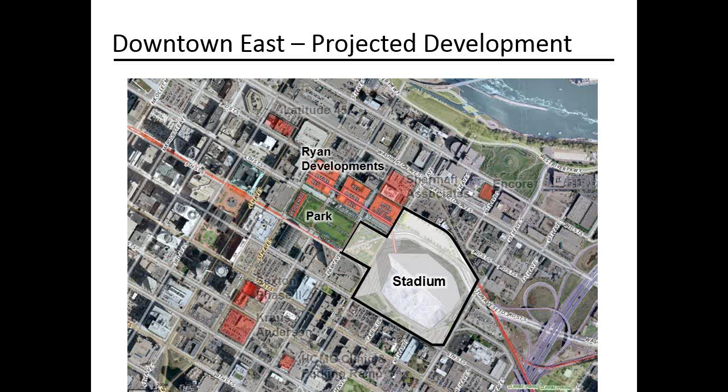For over 30 years, the Metrodome and a sea of surface parking lots have dominated the landscape in Downtown East. However, since the approval of the new stadium, this area has become very popular and gained a lot of attention with developers. The city has approved or been engaged in conversations about a number of development projects. The stadium, the Ryan development, the Commons Park that is going to be constructed, and everything in red are new projects that have either been approved or are in the pipeline to be approved by the city. If realized, we would have 930 dwelling units, 130 hotel rooms, and 1.8 million square feet of office or commercial space built in Downtown East, a vast change from what has happened in the last 30 years.

In addition to new development, there are several transportation projects occurring in Downtown East. There's a new northbound ramp from 4th Street to 35W North under construction. Washington Avenue between Hennepin and 5th Street is being redesigned, with a new vehicle lane and a cycle track added behind each curb. We have a new exit ramp from westbound 94 onto 7th Street being built next year, which will allow for repurposing of the existing exit ramp from 94 onto 5th Street. It's anticipated that 5th Street will be used as a local connection between downtown and the Cedar Riverside neighborhood. I'm sure many of you in this room have been involved in all of those projects.

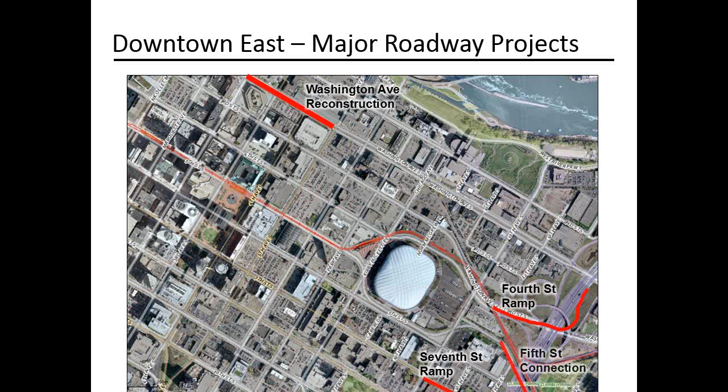This is important because this is different than any other review established in the city for development projects. The stadium was reviewed and approved through an alternative land use review dictated by legislation that waived otherwise applicable regulations, so no zoning regulations were applied to the stadium.

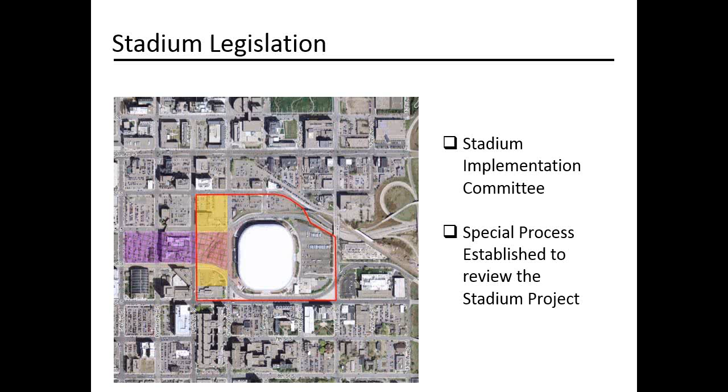If you don't already know, the stadium is 1.5 million square feet in size. There are 65,500 seats with expansion space for up to 73,000 seats for events such as the Super Bowl. At the prow of the building, it's 272 feet tall, equivalent to a 27-story building. Grant Park and Skyscape in Elliott Park, just near the stadium site, are 27 stories.

So for visual purpose, that's how tall this building will be. For reference, the former Metrodome at the peak of the roof was 195 feet tall, so this is going to be much larger than the former Metrodome was.

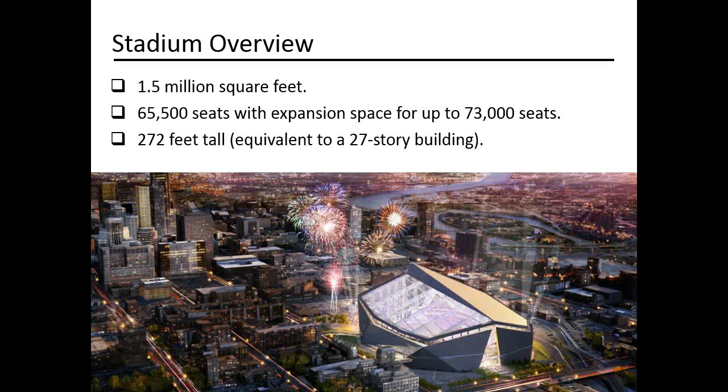The Implementation Committee in 2012 adopted a vision and a set of principles for establishing parameters for its review, because there were no zoning code regulations to help its review. The adopted vision was the best urban football stadium in the country at the core of a vibrant place. A total of 73 principles were adopted, ranging from building design to regional influence.

In August of 2013, the Implementation Committee forwarded a recommendation to the City of Minneapolis to approve a request by the Minnesota Sports Facilities Authority to construct the new stadium.

So the principles that were adopted, I'm going to go through them and give you an idea of what we were tasked with looking at when coordinating with the different parties involved.

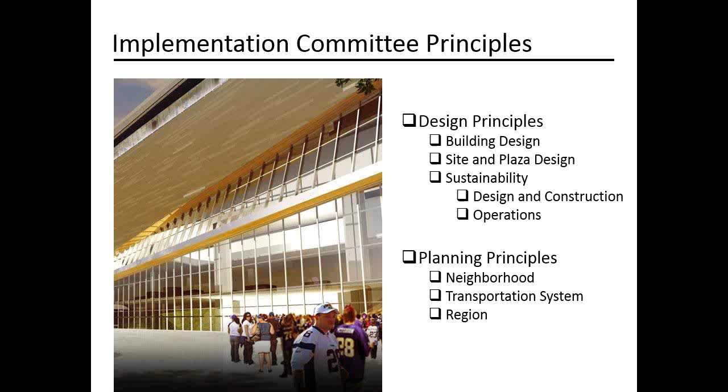For building design, the principles called for a stadium and stadium site that was bold and iconic, that fit in with its surroundings, that didn't turn its back to any of the surrounding streets, and that used landscaping to soften the edges of the building.

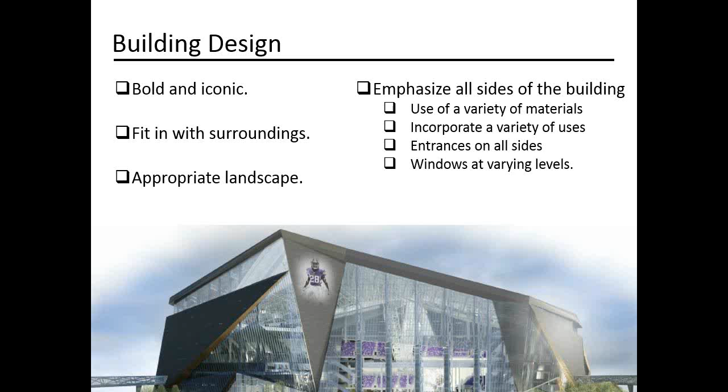The site and plaza design principles required stronger pedestrian connections to the surrounding neighborhoods, the ability to walk all the way around the stadium, a plaza that is a destination every day of the year, not just on event days, and that we incorporate public art into the site and into the building.

There were many sustainability goals for the new stadium, including meeting the B3 Minnesota Sustainability Building Guidelines, pursuing LEED ND for new construction, incorporating best management practices for stormwater into the sites, and coordinating a waste and recycling program within the facility itself.

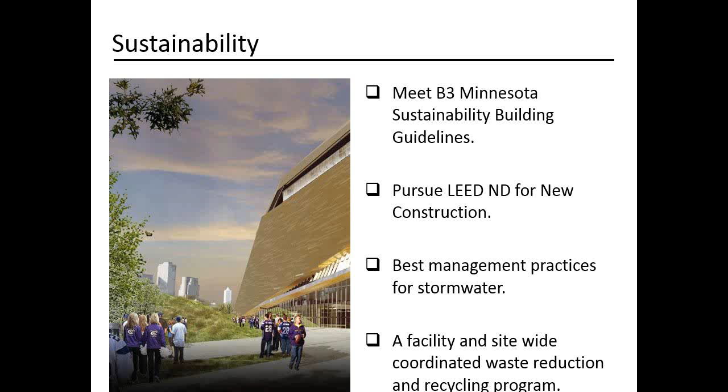The desire of the Implementation Committee was that the new stadium would fit in better with its surrounding neighborhoods, that the stadium would encourage other development in the area—and I think it's done that already—that the stadium would promote more activity at the street level at all hours of the day, not just on event days, that the stadium would program plaza activities for people of all ages at other times, and that the project would enhance the streetscape experience in the area.

The transportation principles called for integration with the existing Downtown East Light Rail Transit Station, improved walking, biking, and transit connections in the area, a reduction in the amount of surface parking, and improved connections to the regional freeway system.

And the regional principles related to the region encourage sustainable, long economic growth and development, supporting diversity in the local workforce, and encouraging business retention and expansion.

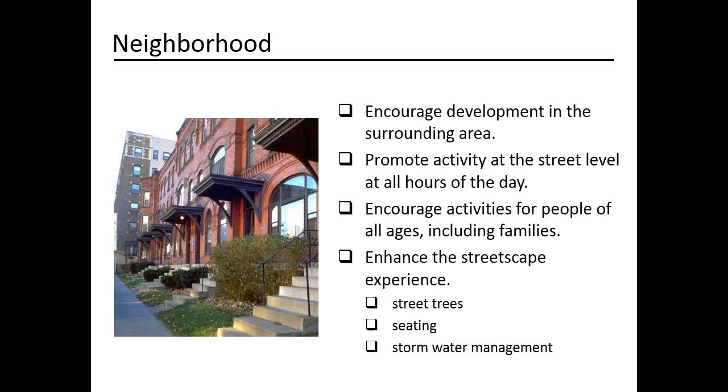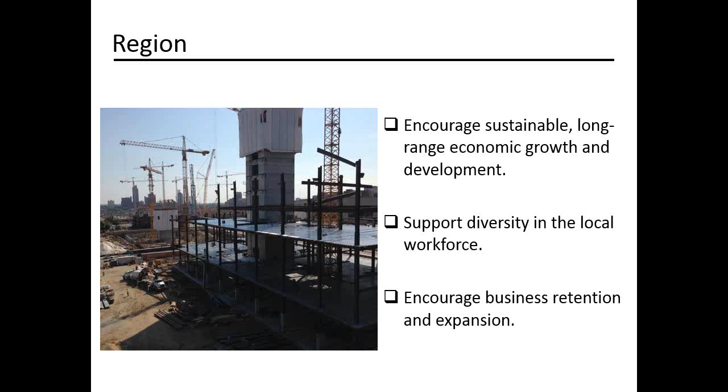Hillary mentioned the stadium and the city implementation committee's principles for the stadium. When it came to transportation, city staff helped translate some of the committee's principles into transportation-related goals. I'll tell you a few of them, starting with some pedestrian-oriented things.

One of the principles translated into a goal was to be sure that pedestrians would be able to walk all the way around the stadium. That was a little tricky because Chicago Avenue is about 15 feet higher than 11th Avenue, and the stadium designers wanted all the fans to be able to enter at the main concourse level. That meant, in order to make their main large plaza a 2% grade from 11th Avenue, they had to have some steps and ramps to get down to 11th Avenue. But you can walk all the way around the stadium.

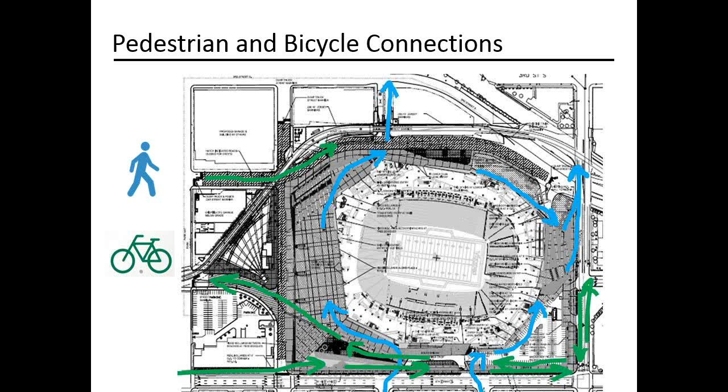The stadium designers needed to ensure security for the stadium site and adequate access for loading docks, deliveries, and drop-offs. They also worked with us to help balance the neighborhood goal for pedestrian connectivity and having the stadium fit in with the neighborhood 365 days a year. Since the site walkways follow the driveways, it was important that driveways weren't too far from the intersections so the pedestrian routes weren't too circuitous.

Now, to tell you about the next transportation puzzle involved with stadium coordination with the city, I'd like to back up to the existing transportation configuration along the south side of the stadium.

5th Street and 6th Street are one-way pairs. 6th Street carries about 9,000 cars a day onto the eastbound entrance ramp for Freeway 94. 5th Street carries about the same number off the westbound exit until they get to 11th Avenue, where most cars turn left or right. But about 3,000 cars a day continue westbound on 5th Street along the south side.

When the stadium authority told us they needed the city's property on 5th Street to make room for the large stadium and its security perimeter, we knew we didn't need to panic. We knew 5th Street probably had some extra capacity, and it was starting to look more and more likely that 7th Street, which Hillary mentioned, would be replacing 5th Street as the westbound Freeway 94 exit.

But we did decide it was important to have a westbound connection at this location, just for ease of access to downtown, some of the downtown properties, and for the value inherent in the redundancy of the downtown transportation grid.

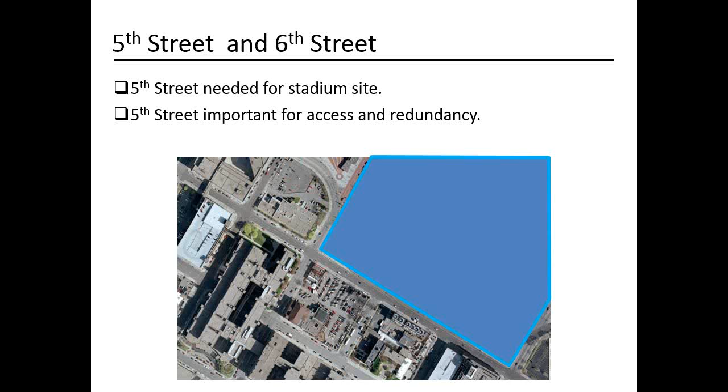But it does mean that there was no pedestrian crossings for 3 blocks, and there was the neighborhood goal to improve connectivity. So we started to look at, with stadium designers, the opportunities.

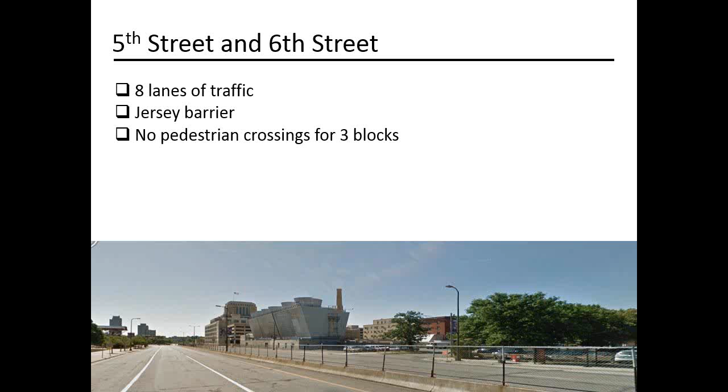Maybe we didn't need both those westbound lanes on 5th Street. Maybe we could take that bike lane off street. Maybe that bike use would be able to fit behind the stadium's retaining wall that establishes the security perimeter, and bikes can't carry fertilizer bombs. So maybe that would reduce the crossing distance for pedestrians, and then we decided that full signal systems will be installed at 9th Avenue, or actually Carew Drive, and 10th Avenue to further ensure pedestrian safety.

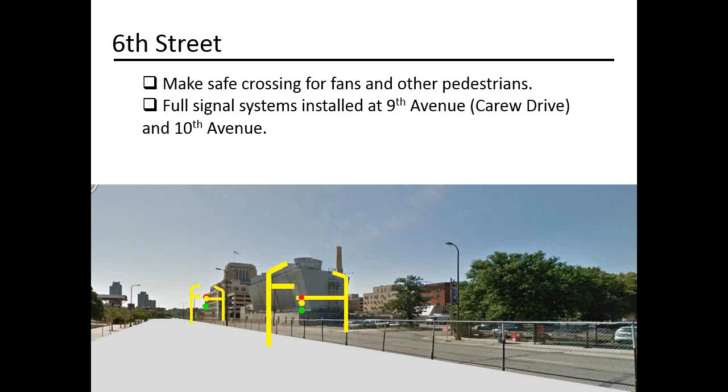One good thing this did was establish a bike route in both directions, which advanced the Minneapolis Bike Master Plan, since we had in the plan to have a westbound facility, but we didn't have that established yet. So this will establish that westbound facility.

The other thing is this is Minneapolis's first K-12 rated barrier protected bikeway. So this will stop an attacking truck from getting you on your bike here.

One more thing about this is the stadium authority was willing to extend that westbound facility an extra block past Chicago Avenue to Park Avenue to make an additional transportation connection, so that you have more options just turning left or right on Chicago Avenue.

So here it is along that block, and between Chicago and Park is the county's medical examiner building. Right now I'm working with Dean McElko to get some input from the county on the design of this, to make sure we can figure out who will maintain what, and in working with Dean to implement a city easement for this bike facility on county property.

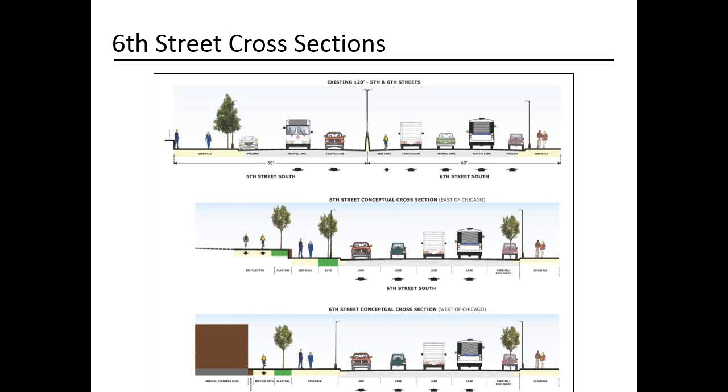Thanks, Jeff. Again, I'm Jim Harwood, Metro Transit. I'm going to talk a little bit about the Downtown East Light Rail Station. The station itself is an important part of the light rail system. It serves both the blue and green lines in downtown Minneapolis. It's also the initial point of transfer between the two lines, so it sees some significant use in that regard. But it's also an important part of those folks attending these events and their travel plans to get to and from the stadium, due to its location directly across Chicago Avenue.

We know that in 2013, last season, for Vikings games at the Metrodome, we averaged about 10.5% of those fans going to the games took the blue line to get there. That was just over 6,700 of those going to the games of the overall attendance. And that's projected to go up to 42% from the mode split, with now the opening of the green line and then the future green and blue line extensions. So that's just over 26,000, up from the 6,700 attendees.

So obviously there's some significant planning efforts that need to be looked at to accommodate that ridership. And I can say that so far this year at TCF Stadium, between the two regular season games, we've averaged just over 24% of the overall attendance taken via the green line to the Stadium Village Station there. So we do feel we're on our way to reaching those ridership goals projected.

As I mentioned, there's a lot of planning and effort involved to accommodate that high projected ridership. The first is providing appropriate signage and wayfinding to direct people to the platforms and queuing areas, making sure those are provided at the right locations, both at the platform and in the plaza areas. The second is developing queuing spaces that allow us to manage those queuing operations to speed people to the platforms and on their way out to their final destinations.

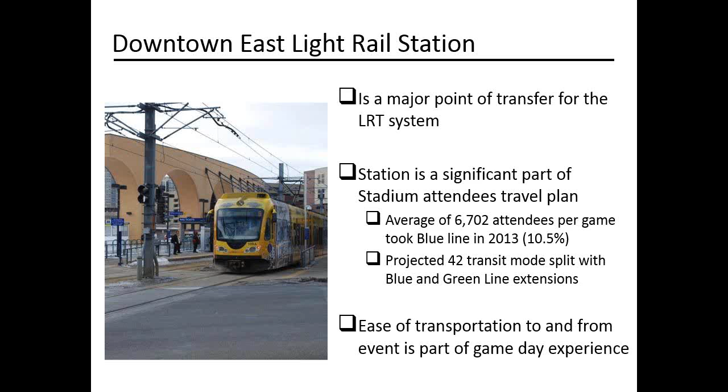The second piece related to ridership is the service itself. Currently we operate Blue and Green Line, each on 10-minute headways in regular service, meaning there's 5-minute combined headways at each platform. At special events such as games, we introduce additional three-car consists into the system, staging them to be introduced at specific times to relieve queues as they start to form and increase.

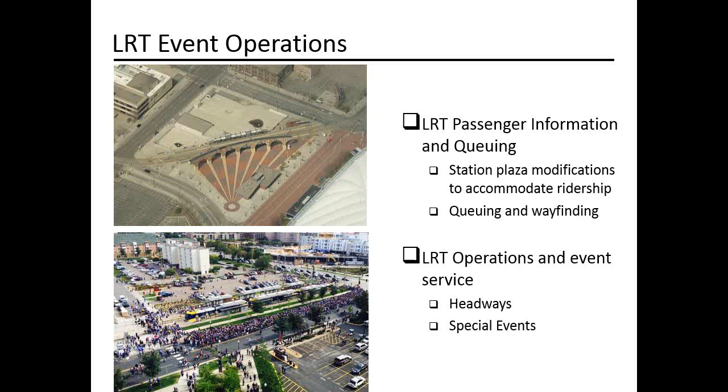Those headways and that frequency, at less than 5 minutes in each direction post-event, lead to the next big transit issue: pedestrian-LRT interactions and conflicts. Pedestrian studies done as part of the stadium planning and transit coordination show that of the 65,000 capacity, about 21,200 people need to cross the light rail to get to their final destinations.

It's also known from those studies that in close game scenarios where people stay to the final whistle, about 70% of attendees actually leave during that first peak 15 minutes. So that's a significant amount of people needing to cross the light rail in a very short period of time.

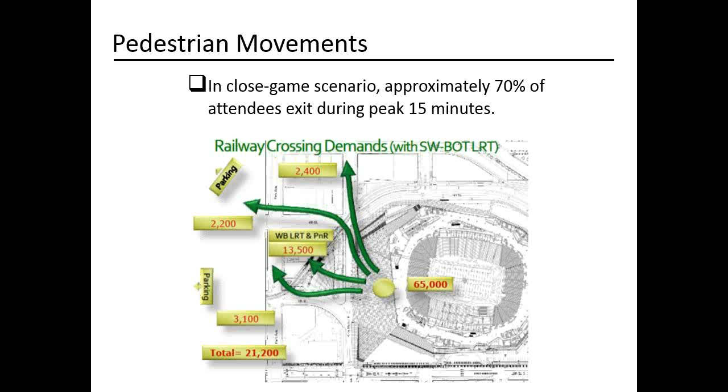In 2013, there were about 3 to 4 trains, based on just Blue Line service, that would come in that first 15 minutes. It's anticipated that with the extensions of the Blue and Green Line and the trains required to accommodate that ridership, that number would grow to about 8 trains, a train every 2 minutes.

That leaves about a 65-second window where we're trying to cross 2,100 pedestrians across the light rail. That is then repeated every 2 minutes for a significant period of time, which raises significant safety concerns. It's really not achievable from an operations standpoint to repeat that.

That leads to safety concerns and also a lot of operations concerns about how you manage that and how you avoid causing delays, which start to come up not only in post-event operations but actually all the way through the system itself. So we've been looking at ways to work through this and provide a solution.

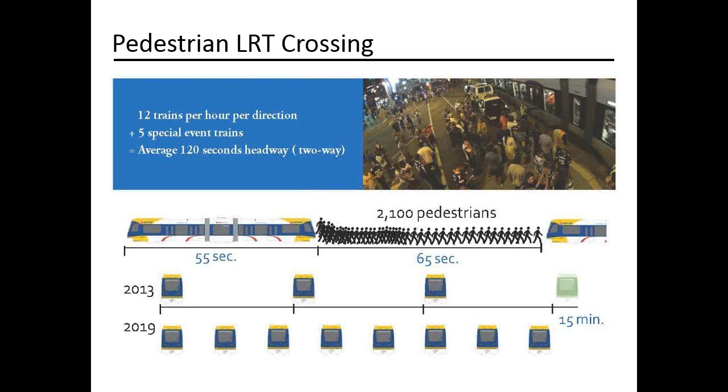In terms of the pedestrian-LRT crossing, we've been looking into and proposing to engineer and design a pedestrian bridge that would significantly mitigate that crossing issue by taking folks out of it, providing a grade-separated crossing and taking people away from that conflict. It significantly mitigates the safety concerns, and it would also allow for unimpeded rail service, which is necessary to achieve the frequency and ridership numbers.

One of the ways we want to work with the city has to do with some post-event street closures, specifically at 4th and Chicago. If anybody's been to a game and come out right at that intersection at the Dome over the past few years, you know how trying a situation it can be to get where you're going. With the increase in frequency, even with Green Line, that would be significantly worse. So post-event street closures would be part of this, and that's something Jeff is going to talk about related to the event traffic management plan.

Thanks, Jim. So one of the next big puzzles that'll need to be addressed is the event traffic management plan. The stadium authority is going to take the lead and coordinate with the city and other appropriate agencies to establish an event traffic management plan that addresses all modes of transportation to get to and from the stadium.

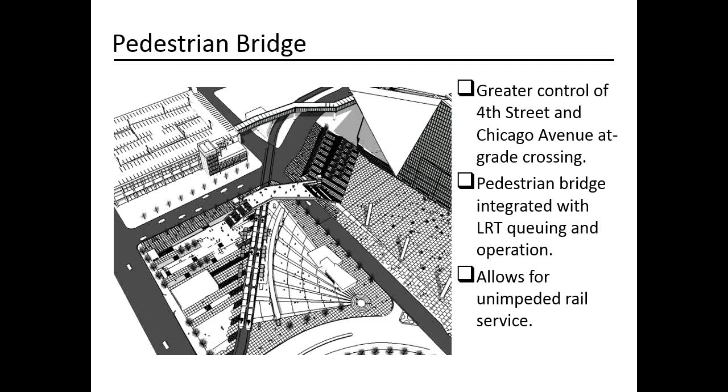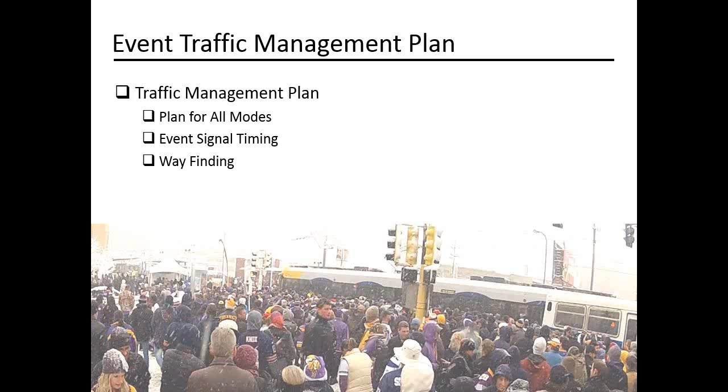The plan will need to include a special event signal timing plan. It'll need to figure out where and what types of wayfinding should be installed with the new stadium project, maybe fixed wayfinding, maybe also variable message signs. It'll need to include traffic control agencies and figure out where traffic control officers should be placed to help the flow of traffic and traffic safety on game days. It should include a curbside management plan and figure out where charter buses and taxis should stage.

And as Jim mentioned, figure out where to close streets for temporary closures on game days for stadium security and safety. So that's one of the next big challenges ahead.

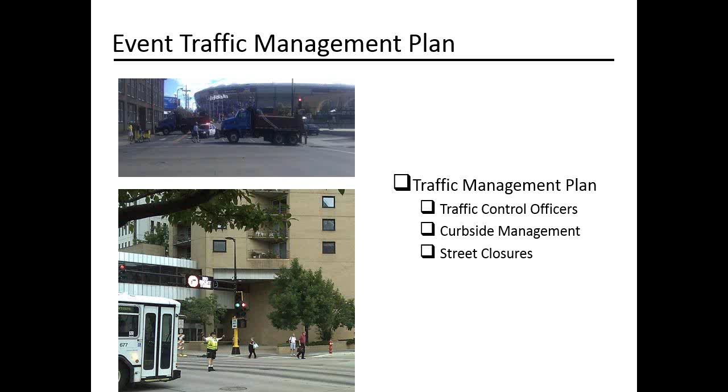And to wrap this up, I'd like to turn it over to Hillary to mention one or two more. I was trying to tell Jeff that he could just finish this off because it's really what's on the slide.

Our challenges ahead are working with the MSFA to complete the traffic management plan. It's really up to them to get that going, and the city will need to review and approve it, but they are the lead on that plan. We need to figure out tailgating. I don't have any news for you on where you can tailgate in 2016, but there is a committee established at the city to work with the MSFA and the team about where people will be able to grill and throw footballs, and the integration of other development projects in downtown East.

The major project under construction now, the Wells Fargo Ryan development, did an AUAR, and the stadium went through an EIS project. Both of those had travel demand management planning as a major component, and we coordinated those. We learned a lot from doing the travel demand management plan for the Ryan project after we had just completed the one for the stadium. If we have any other major projects downtown, the compilation of all of those will be pulled together. So as I started off, there's a lot going on down here, and we're hoping that trend continues, and this area of downtown will look nothing like it did when the Metrodome was there.

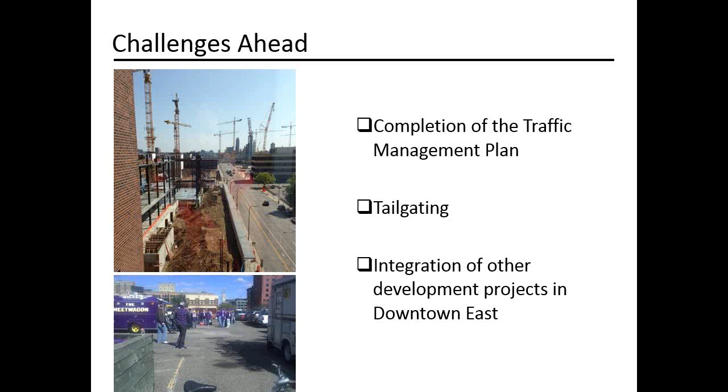This is who we are, and we're here for questions. So I'd like Jeff and Jim to come back up.

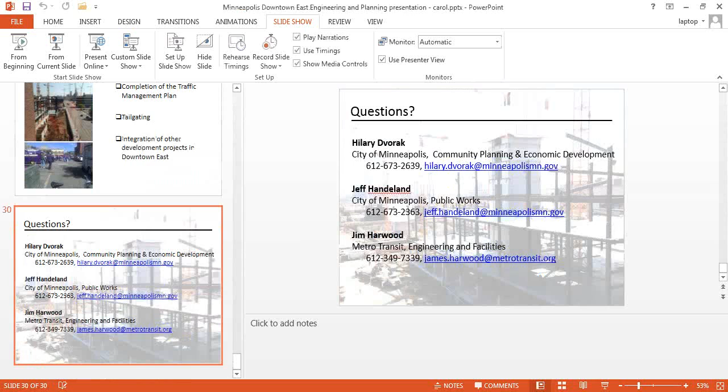Maybe we should just reiterate that Hilary and Jim and I are kind of public agency liaison coordinator people who help take all the input from our subject matter experts at our agencies and coordinate it with stadium implementation committee members and city council members, and try to help the stadium designers for the stadium authority consider those things as they design the stadium. So that's the way I see this. We actually have some stadium designers in the audience too, so if the questions get tough, we're going to go to our lifelines, John and Pat and Junette and Roger.

Hi, so you mentioned closing 4th and Chicago on game days. Has that already been done for Vikings games next season? How many do you think you could get away with each year for special events? I had a question about that myself, given that investment's being made at the 4th Street to northbound 35W on-ramp—is that kind of a conflict, those two things happening?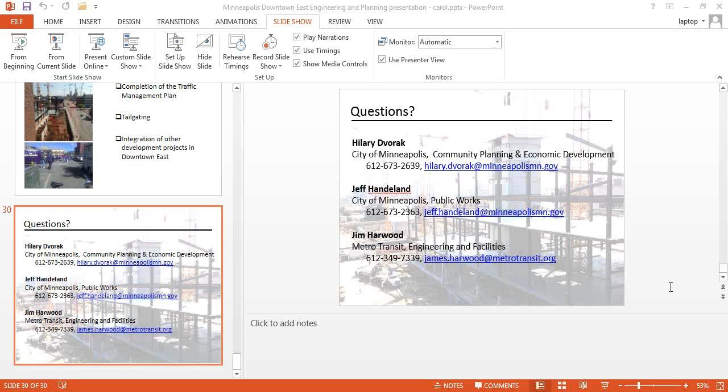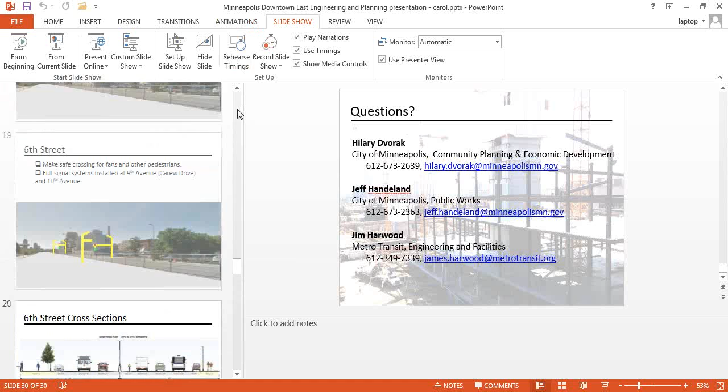Thanks. Can we go to a slide? Within the Metrodome configuration, 4th and Chicago is currently closed on game days, and that's not expected to change. There's far too much complication between pedestrians and trains at 4th and Chicago, so I'm sure that won't open back up to cars.

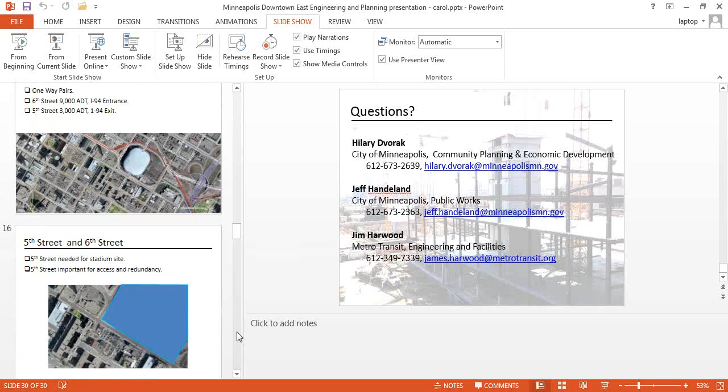So as Paul led the next part of that question, it'd be nice to be able to utilize the northbound ramp to 35W that the county is currently taking the lead on from 4th Street, for game day traffic, because Washington Avenue is just a parking lot on game day. So there have been some ideas about that, and who knows—that could be a next puzzle to be solved.

There is some interest in it from, I think, the Vikings, and maybe the city—maybe there's a way to configure a section of 3rd Street to be two-way, giving vehicles an opportunity to take Park over to a two-way 3rd Street, and then make a connection between 3rd Street and 4th Street, so vehicles could stay away from this tricky spot, stay out of the stadium security perimeter, and make it onto northbound 35W. So there have been some discussions, maybe there'll be more—that could be another puzzle added to the mix.

That's what the event traffic management plan is intended to do—really define how those event days, the street network, and the transportation networks do their work. You should probably come over here so they can hear you. Any other questions from the audience?